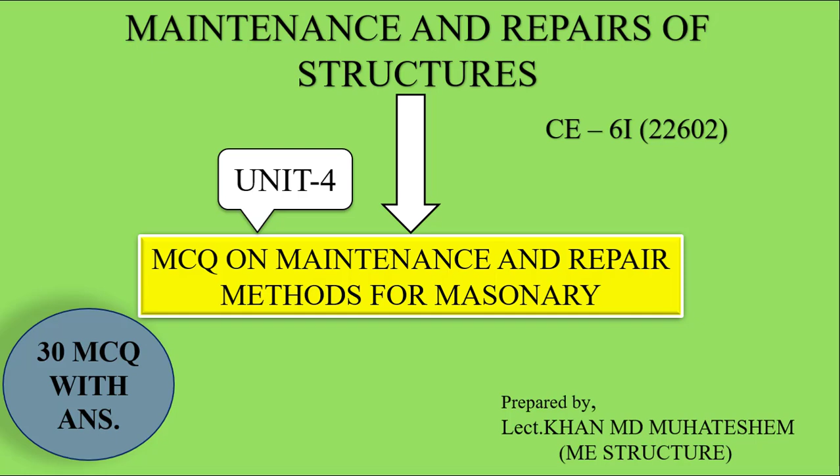चलिए स्टार्ट करते हैं एमसीक्यू ऑन मेंटेनेंस एंड रिपेयर मेथड्स फॉर मेसनरी। Question number 1, cracks are broadly classified into dash type. Option A 2, option B 3, option C 4, option D 5. The right answer is 2.

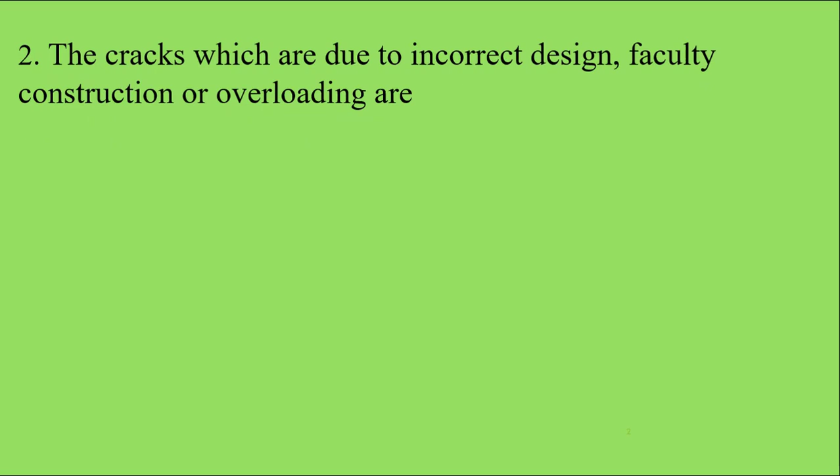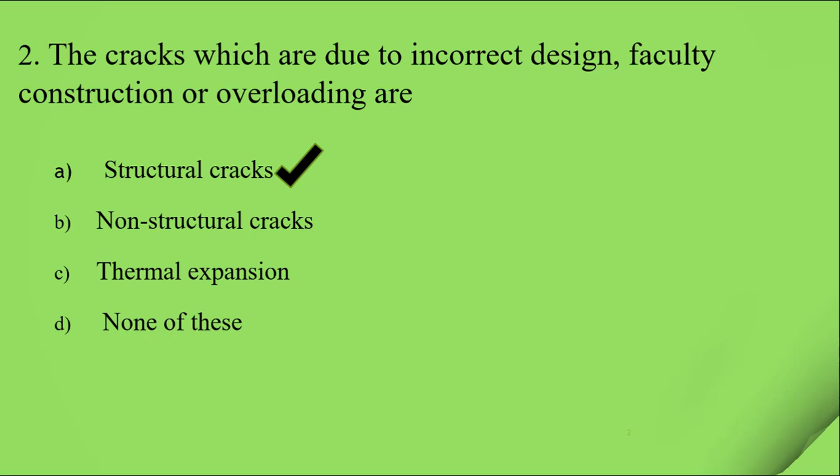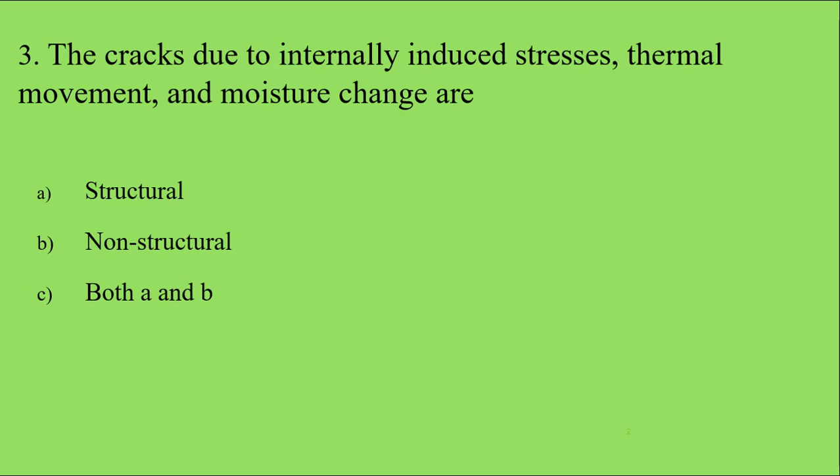Question number 2, the cracks which are due to incorrect design, faulty construction or overloading are: option A structural cracks, option B non-structural cracks, option C thermal expansion, option D none of these. The right answer is structural cracks. Question number 3. The cracks due to internal induced stresses, thermal movement and moisture change are: option A structural cracks, option B non-structural cracks, option C both A and B, option D thermal expansion. The right answer is non-structural.

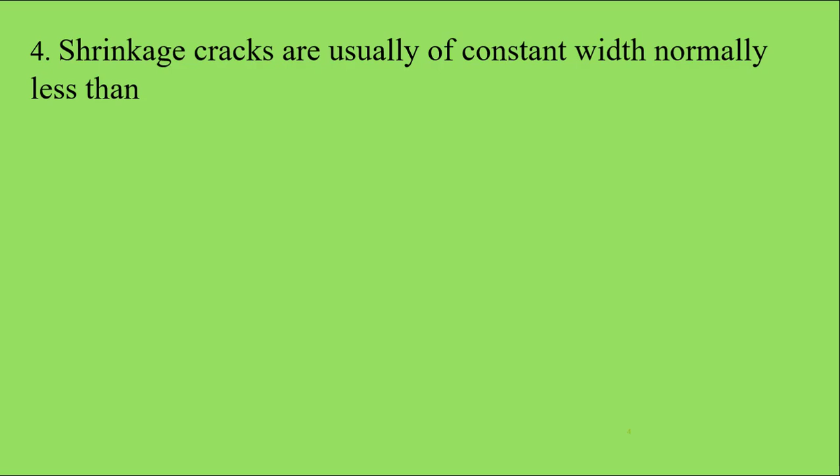Question number 4. Shrinkage cracks are usually of constant width, normally less than: option A 10 mm, option B 5 mm, option C 2 mm, option D 7 mm. The right answer is 2 mm. Question number 5. Expansion of cement, mortar and concrete is almost dash of the bricks: option A same, option B twice, option C thrice, option D none of these. The right answer is twice.

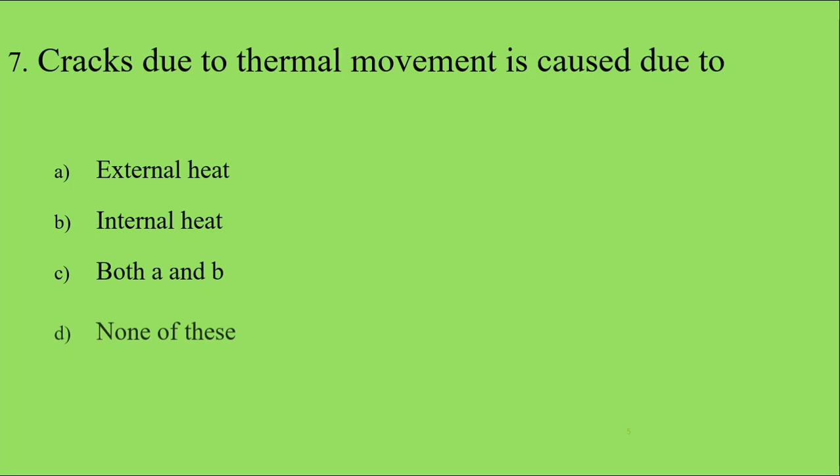Question number 6. Movement in brickwork in vertical direction is dash more than in horizontal direction: option A 75%, option B 70%, option C 60%, option D 50%. The right answer is 50%. Question number 7. Cracks due to thermal movement is caused due to: option A external heat, option B internal heat, option C both A and B, option D none of these. The right answer is both A and B.

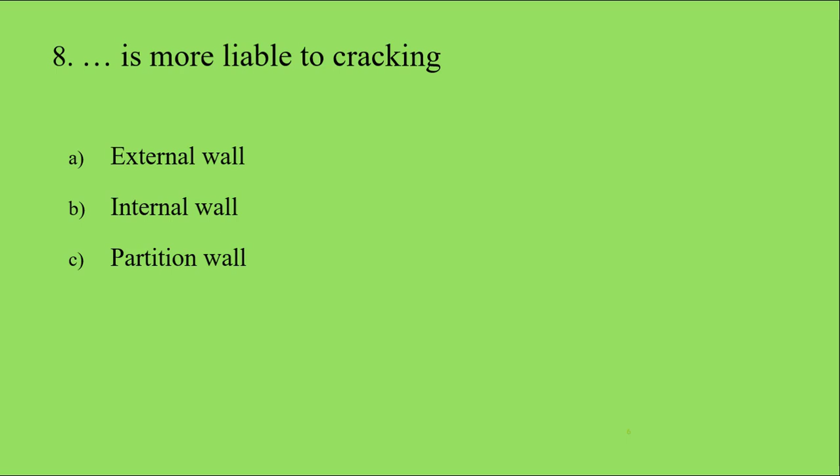Question number 8. Dash is more liable to cracking: option A external wall, option B internal wall, option C partition wall, option D none of these. The right answer is external wall. Question number 9. How many ways cracking in wall and floor can occur when soil under the foundation of a building is shrinkable clay? Option A 2, option B 3, option C 4, option D 5. The right answer is 3.

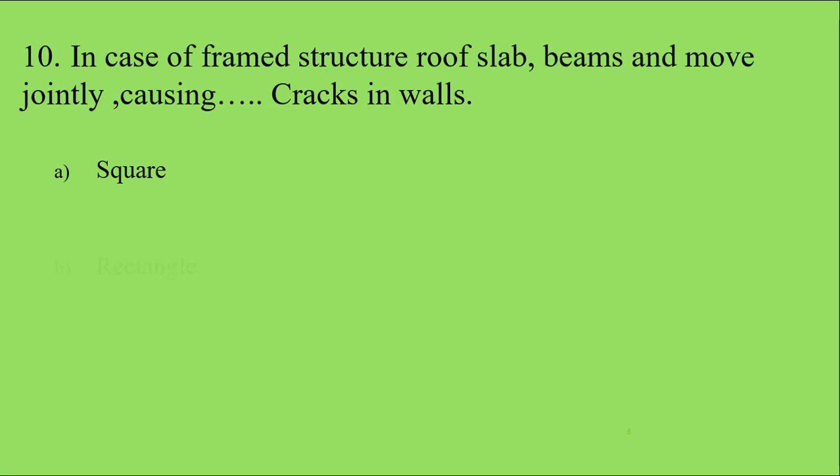Question number 10. In case of framed structure, roof slab, beams and move jointly, causing dash cracks in wall: option A square, option B rectangle, option C triangle, option D diagonal. The right answer is diagonal. Question number 11. In partition wall, a horizontal expansion joint dash on top of the wall can be provided for prevention: option A 10 mm, option B 20 mm, option C 30 mm, option D 40 mm. The right answer is 10 mm.

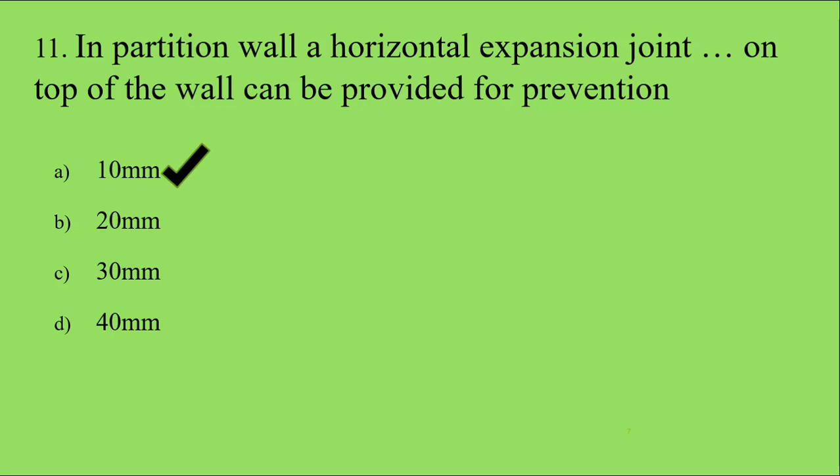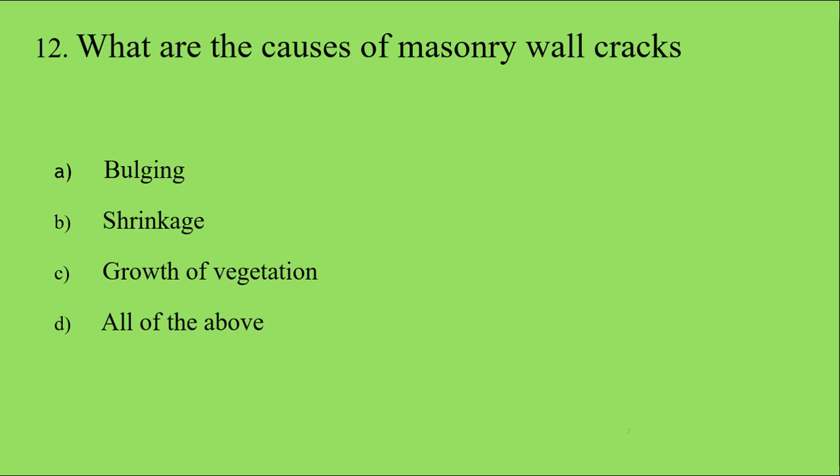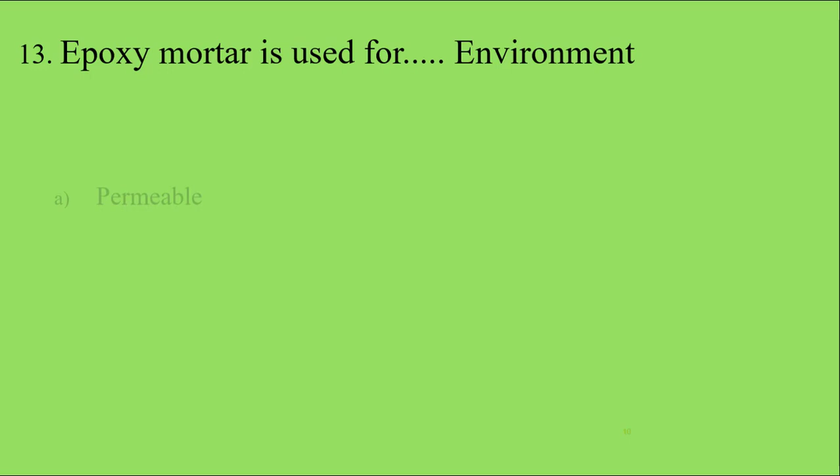Question number 12. What are the causes of masonry wall cracks? Option A bulging, option B shrinkage, option C growth of vegetation, option D all of the above. The right answer is all of the above. Question number 13. Epoxy mortar is used for dash environment: option A permeable, option B solid, option C impermeable, option D none of these. The right answer is impermeable.

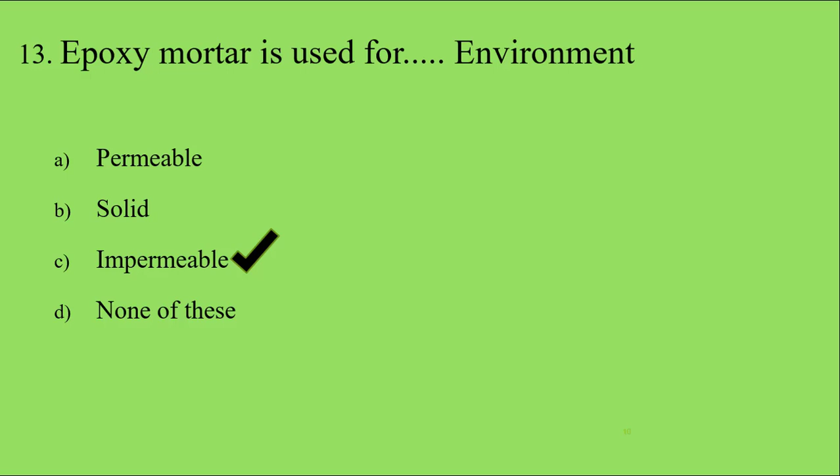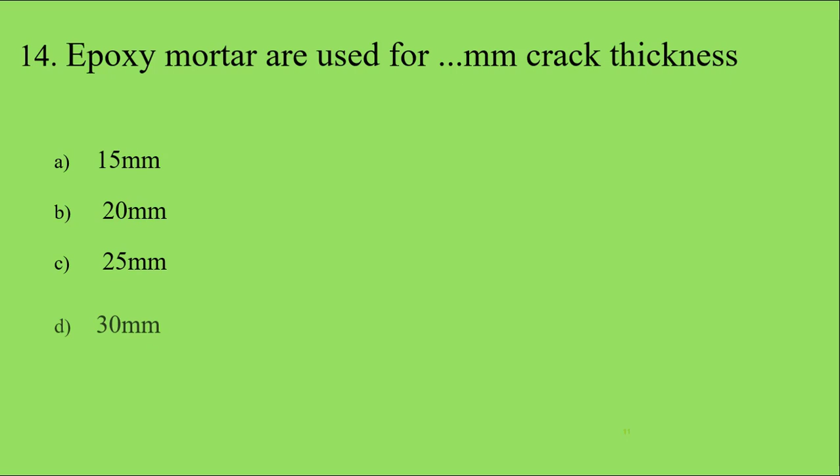Question number 14. Epoxy mortar are used for dash crack thickness: option A 15 mm, option B 20 mm, option C 25 mm, option D 30 mm. The right answer is 25 mm.

Question number 15. Epoxy injection method is for bonding crack sections of width minimum dash mm to maximum dash mm. Option A 0.05 to 0.075 mm. Option B 0.025 to 0.076 mm. Option C 0.5 to 0.7 mm. Option D none of these. The right answer is 0.05 to 0.075 mm.

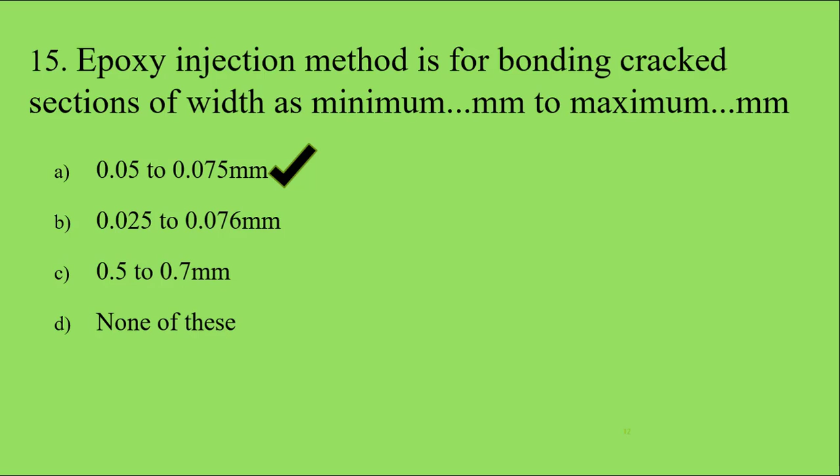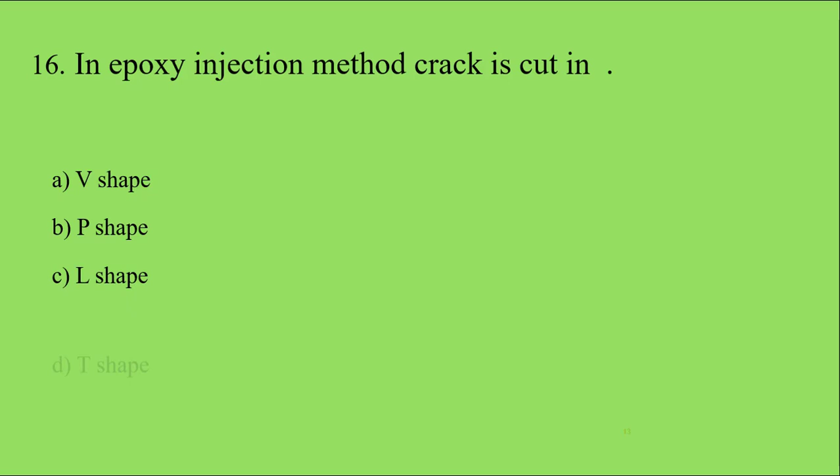Question number 16. In epoxy injection method, the crack is cut in option A V shape, option B P shape, option C L shape, option D T shape. The right answer is V shape.

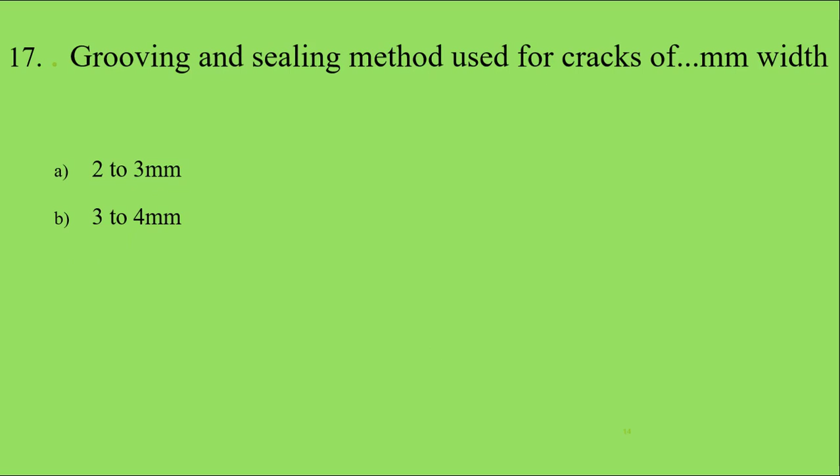Question number 17. Grooving and sealing method is used for cracks of dash mm width. Option A 2 to 3 mm, option B 3 to 4 mm, option C 2 to 4 mm, option D 3 to 5 mm. The right answer is 3 to 4 mm.

Question number 18. The aim of sealant is to create a barrier to dash and to join the crack surface. Option A air, option B water, option C concrete, option D none of these. The right answer is water.

Question number 19. In the shotcrete process, dash cement is generally used. Option A ordinary Portland cement, option B low heat cement, option C rapid hardening cement, option D none of these. The right answer is ordinary Portland cement.

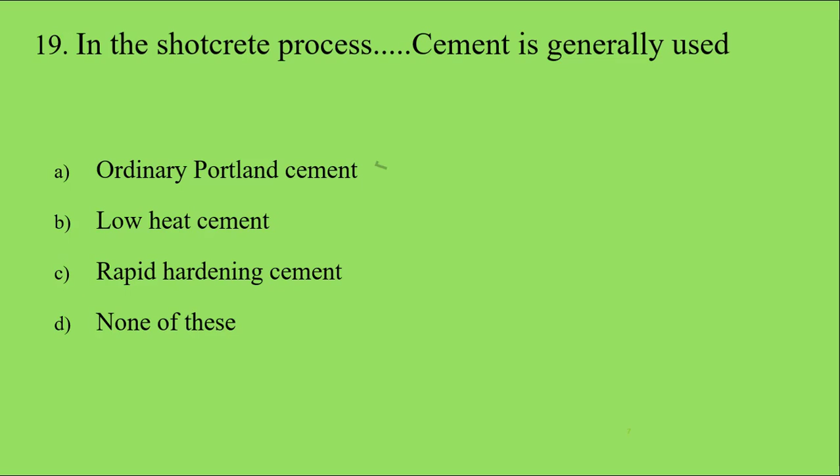Question number 20. Dampness is caused due to option A leakage through the defective roof, option B chemical reaction, option C lack of curing, option D none of these. The right answer is leakage through the defective roof.

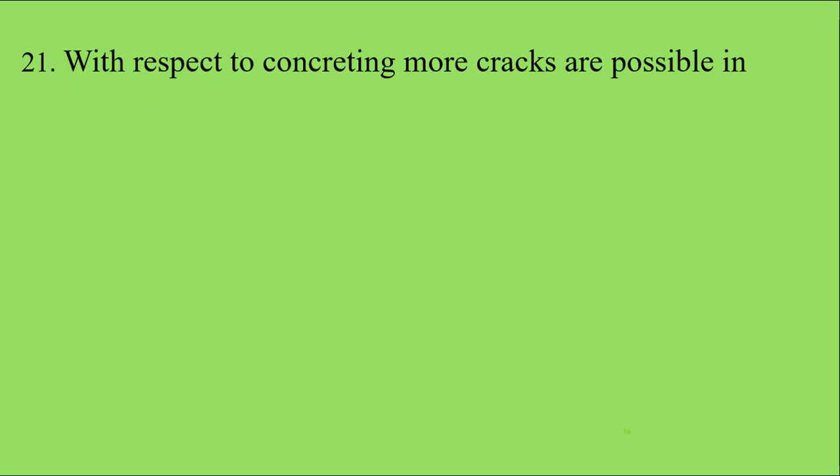Question number 21. With respect to concreting, more cracks are possible in option A summer, option B winter, option C monsoon, option D none of these. The right answer is summer.

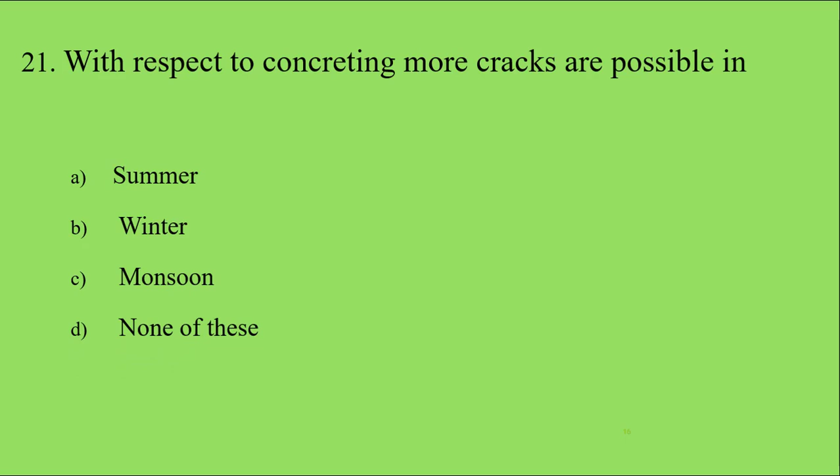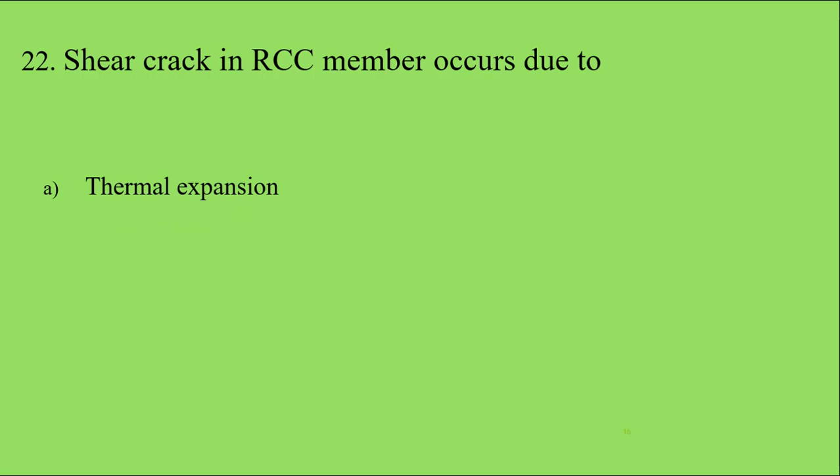Question number 22. Shear cracks in RCC members occur due to option A thermal expansion, option B large differential settlement in the foundation, option C deflection of RCC beam, option D all of these. The right answer is all of these.

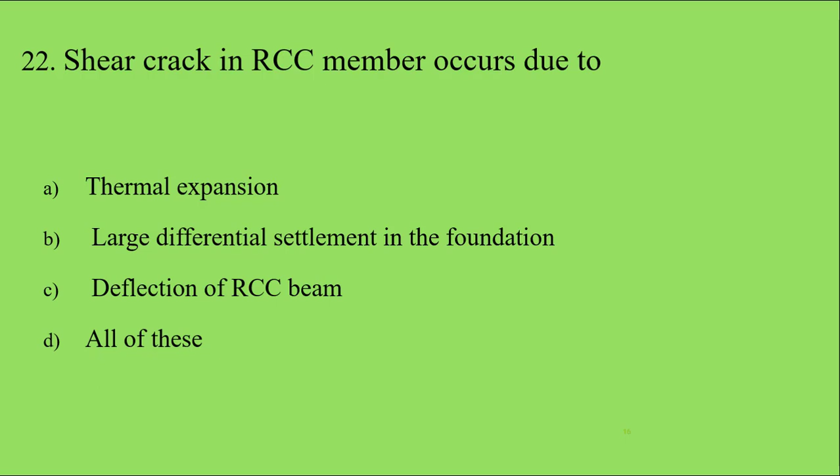Question number 24. Dash is a preventive measure for spalling in masonry wall. Option A masonry sealant is used. Option B lime wash is used. Option C anti-corrosive material is used. Option D none of these. The right answer is lime wash is used.

Question number 25. Lime concrete (Link Koba) is used to option A prevent leakage through RCC slab, option B provide proper drainage, option C add structural strength to slab, option D none of these. The right answer is prevent leakage through RCC slab.

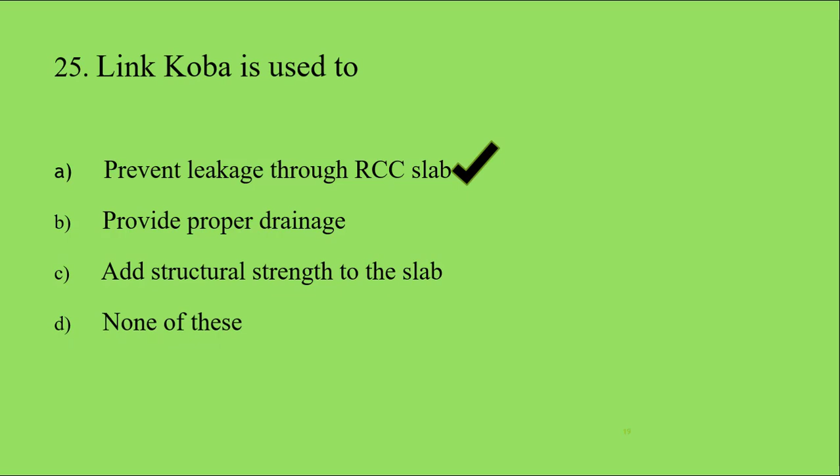Question number 26. When the depth of filling is not more than 45 cm, compaction of the soil is done after putting a layer of rubble of thickness option A 30 to 35 cm, option B 30 to 40 cm, option C 20 to 30 cm, option D 30 to 45 cm. The right answer is 30 to 40 cm.

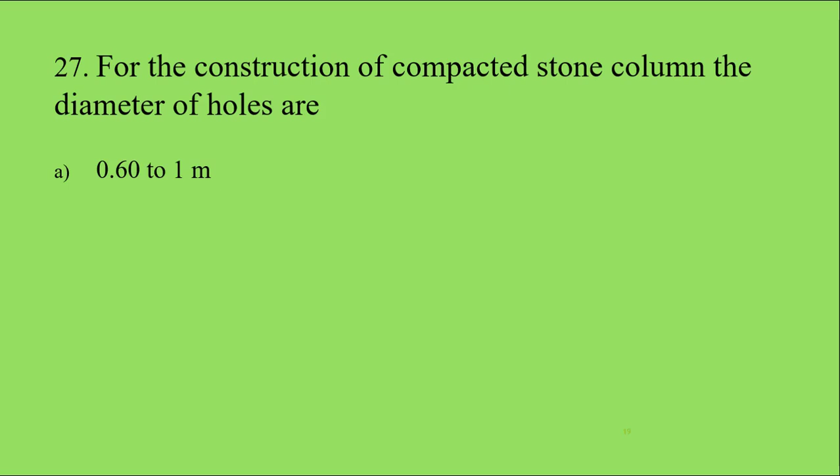Question number 27. For the construction of compacted stone column, the diameter of holes are option A 0.6 to 1 meter, option B 0.5 to 1 meter, option C 1 to 2 meter, option D none of these. The right answer is 0.6 to 1 meter.